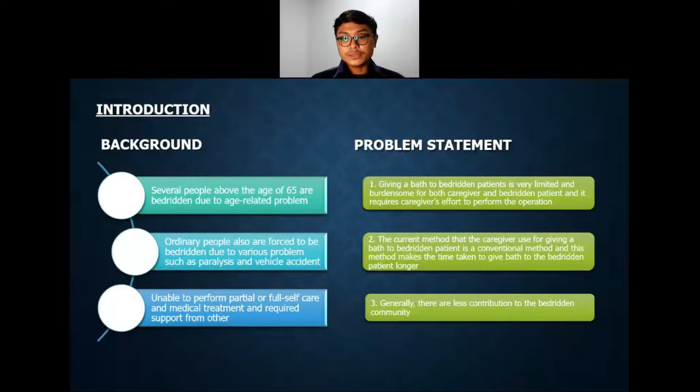And my problem statement in this PSM2 is that giving a bath to bedridden patients is very limited for caregivers and bedridden patients, and it requires caregiver effort to perform the operation. The current method that the caregiver uses for giving a bath to a bedridden patient is a conventional method, and this method makes the time taken to bathe the bedridden patient longer. Generally, there is less contribution to the bedridden community.

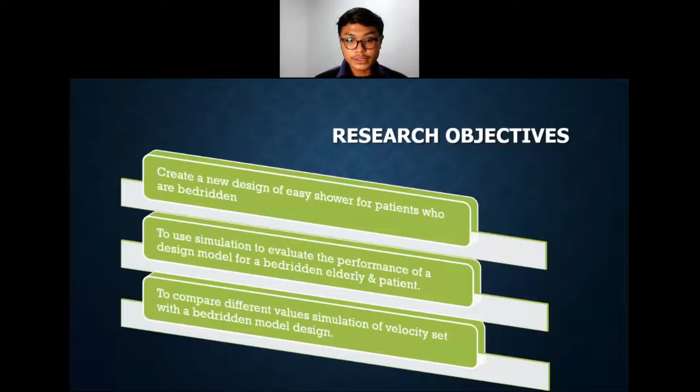My research objectives are to create a new design of easy shower for patients who are bedridden, to use simulation to evaluate the performance of a design model for bedridden elderly and patients, and to compare different values of velocity set with the bedridden model design. So my scope in this project: this study will use a simulation process to design and analyze the shower design and evaluate the different values of velocity set with the design for the bedridden elderly and patient.

So we go to the literature review related to my PSM2. Downey and Lloyd 2008 stated that bed bathing can help manage hygiene for bedridden patients with two methods. The first is cultural awareness and personal preference. Caregivers should consider elderly and patient preference so that the bedridden will be in a comfortable condition. And then another one is privacy and dignity. Without confidentiality during the procedure, the patient may feel uncomfortable or even irritated.

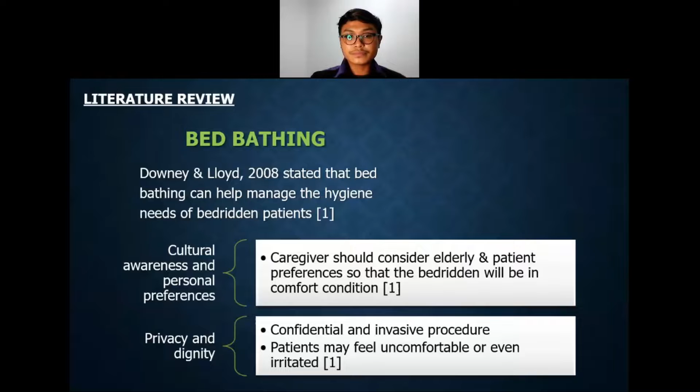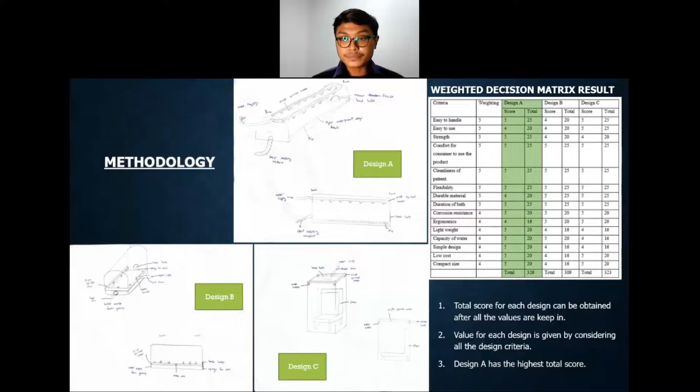So I will go to the methodology. It has been discussed in PSM1. There are design A, design B, design C, and I already chose design A because of the evaluation method result. The total score for each design can be obtained after all the values are given. Values of each design are given for all the design criteria. And design A has the highest total, as you can see in the green line.

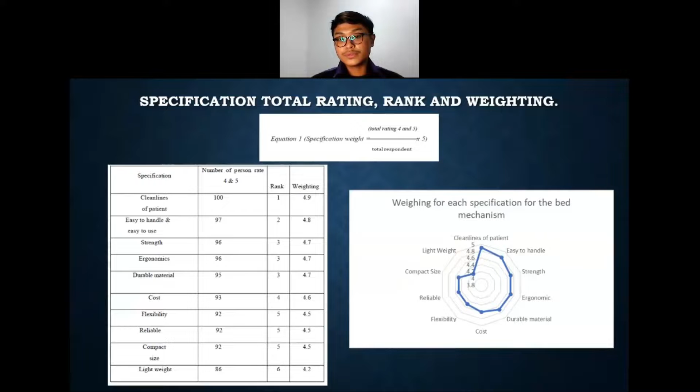So from the result, we get the specification ranking and weighting. And in this specification, I chose the three highest, which are cleanliness of patient, easy to handle and easy to use, and lastly strength. Actually, strength is very important for bedridden, but we must focus on the cleanliness of the patient.

So next, after the result, we go to the final design. Design A obtained the highest score and had been chosen as the design for simulation. There are some modifications that had been made on design A. The original design A has 1 water inlet and 7 water outlets, which are the sprinklers, and the position of the water inlet and outlet is different.

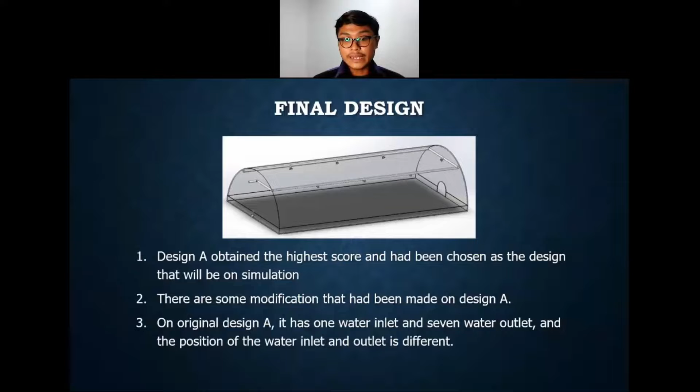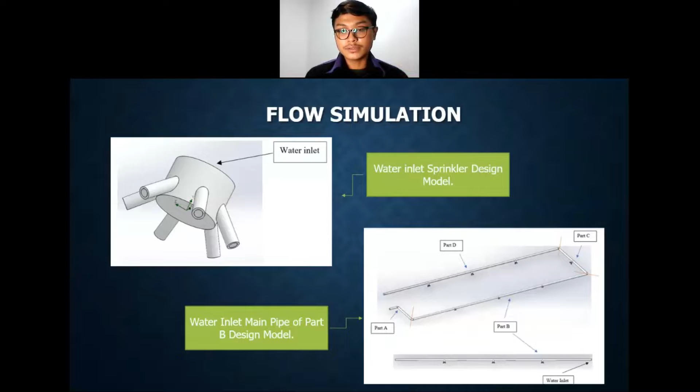So in this flow simulation, I provide only two simulations, which are the water inlet sprinkler design model and the water inlet main pipe of part B design model. Why I choose part B? Because it has been split into four, which are part A, part B, part C, and part D. Why part B? Because it actually has the same result as part A, part C, and part D. The initial and final results are the same.

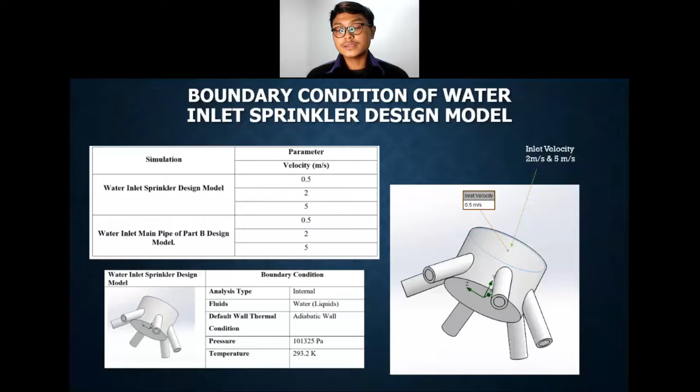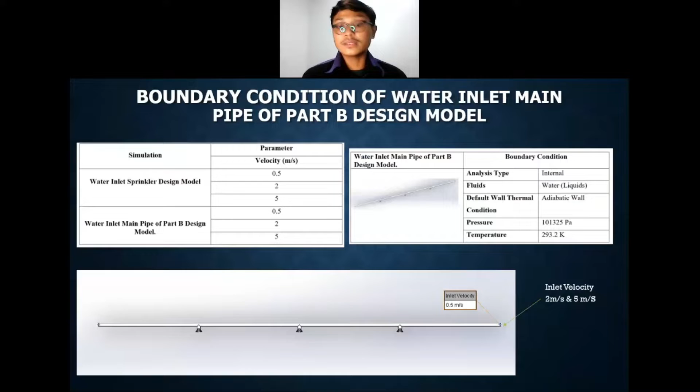I choose the inlet velocity, and then we go to the boundary condition of the water inlet main pipe of part B design model. The parameters are the same as the water inlet sprinkler design model. The boundary condition is also the same: analysis type, fluid, default wall thermal condition, pressure and temperature. In flow simulation, why I choose this? Because the initial flow is the inlet velocity. So we go to the result and discussion.

Flow analysis, for this I discuss the flow analysis trajectory simulation water inlet of sprinkler design model. It shows two types, which are velocity and pressure. So I will discuss the 0.5.

For the initial result, I got 0.446 meter per second with similar. And then 2 meter per second, I got 1.769. And then lastly 5 meter per second, I got 4.427 meter per second.

And then the pressure for the 0.5 meter per second, I got 118,446.61 Pascal. And then for 2 meter per second, I got 376077.97 Pascal. And then lastly, for 5 meter per second, I got the pressure 1799710.48 Pascal.

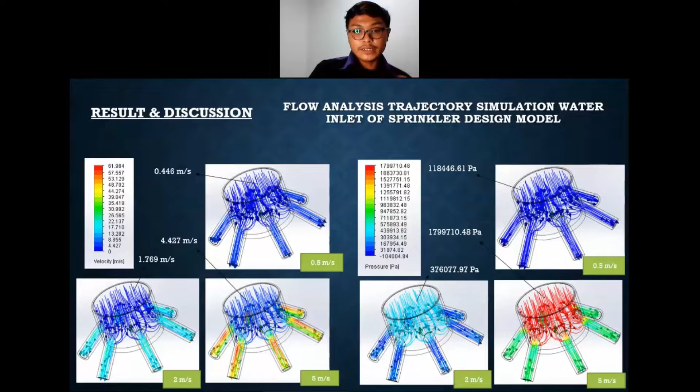Why velocity and pressure flow was different? Because velocity initial was slow, but the orifice sprinkler, which is a nozzle, inside the nozzle was higher, and then the pressure initial result was higher, but in the orifice sprinkler the pressure was slower.

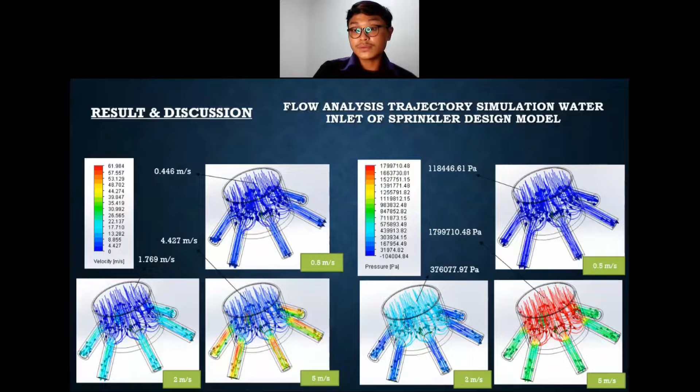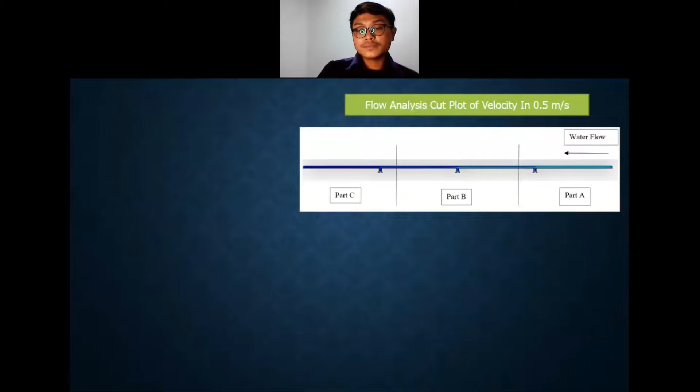So we go to the flow analysis, flow cut plot, water inlet, main pipe of part B design model. So I divide it into three parts: part A, part B, and part C.

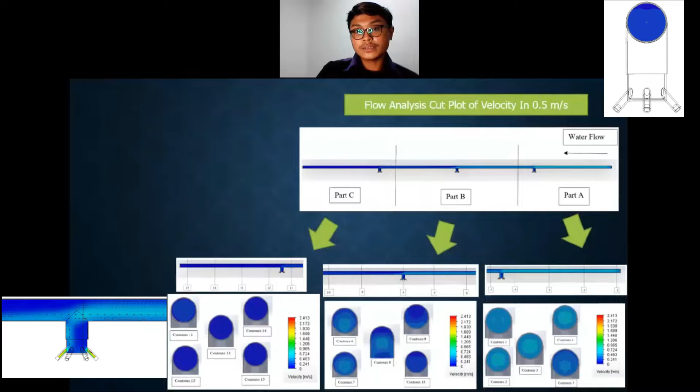So this is the pattern of the flow analysis cut plot of velocity at 0.5 meter per second. So I will discuss the graph. For the first sprinkler at 1.66 meter, I got 0.597 meter per second.

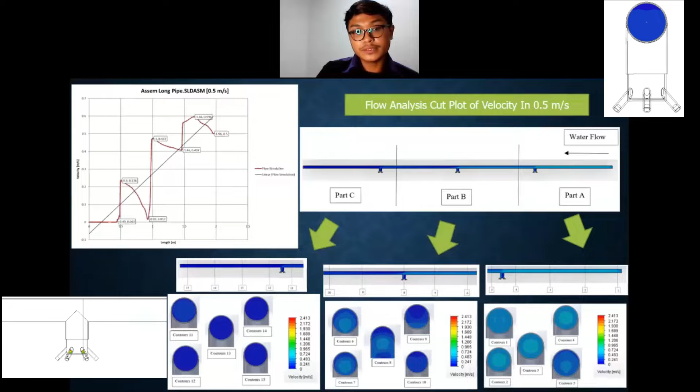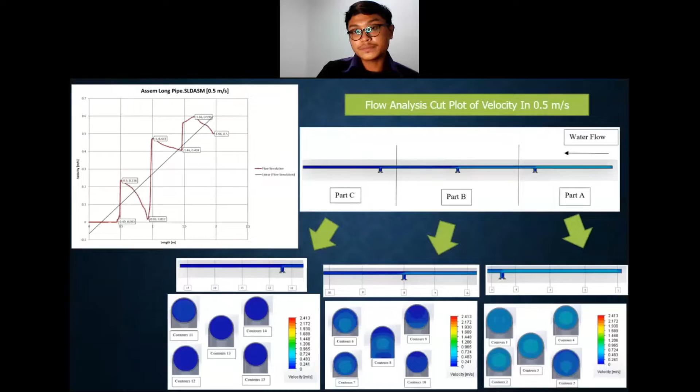And the second sprinkler, I got 0.472 per second at 1 meter. After the final result of sprinkler, I got 0.236 meter per second. And then the pressure was the same.

And the same method, with part A, part B, part C. And then what we can see, the pattern, part A and part B were different, but part C was similar.

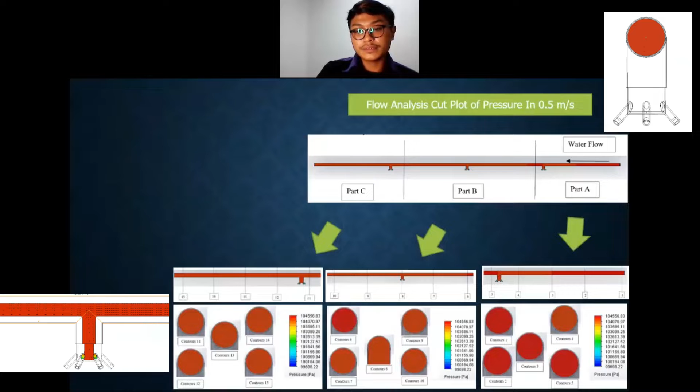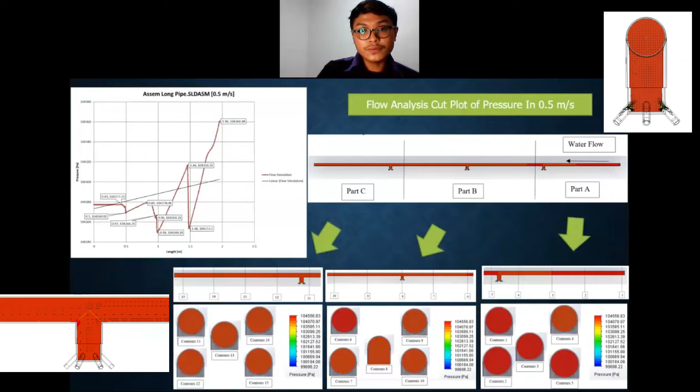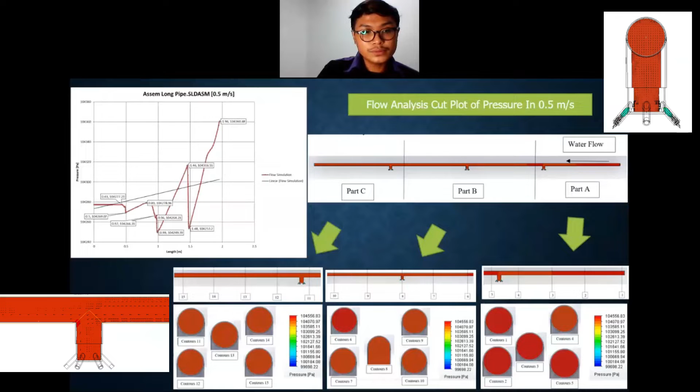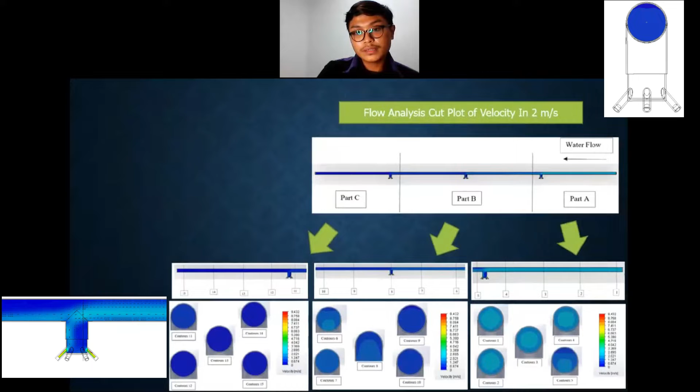And the part A, the pattern was similar. Part B was much different, but in part C, it was a similar result.

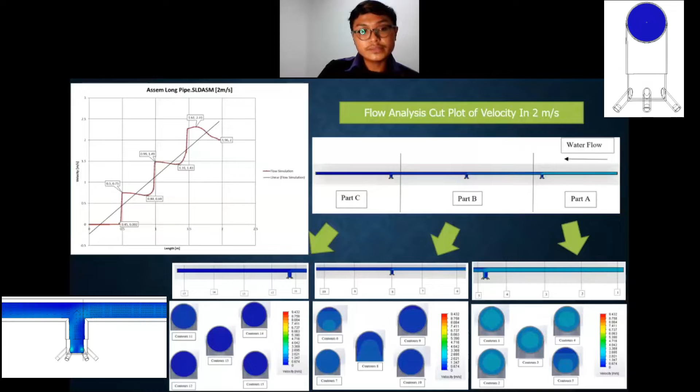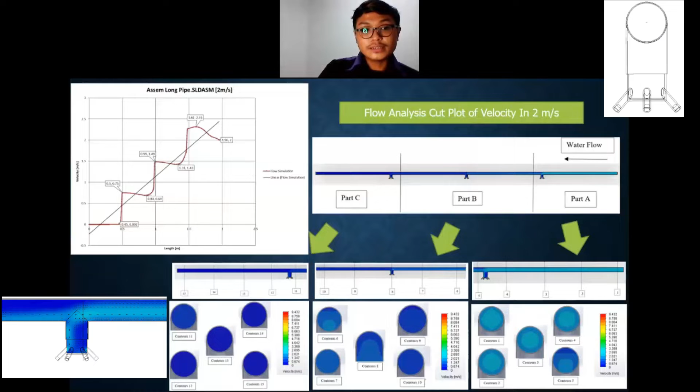So the first sprinkler actually, I got 2.31, and the second sprinkler, which is 1.49 meter per second, and lastly I got 0.75 meter per second.

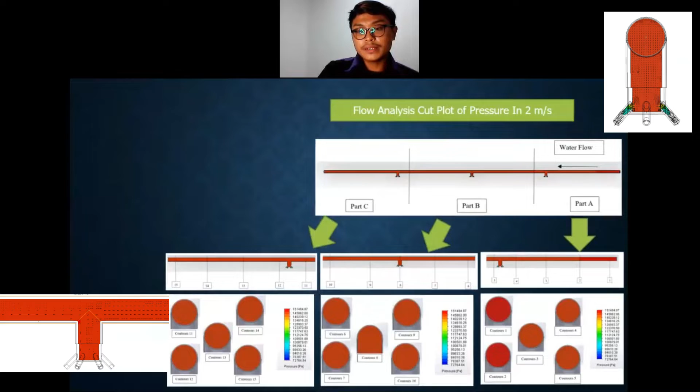While the pressure, the part A was a different result, but part B and part C were similar results.

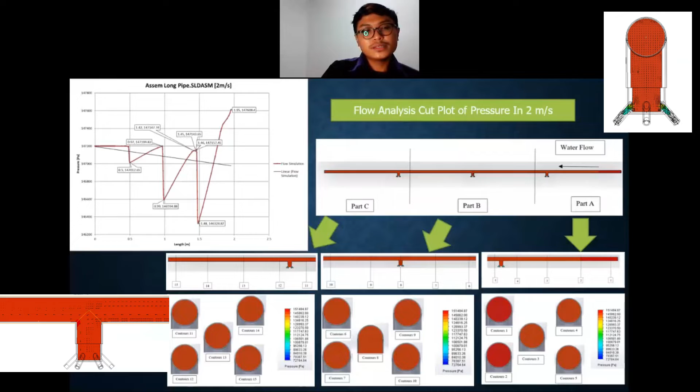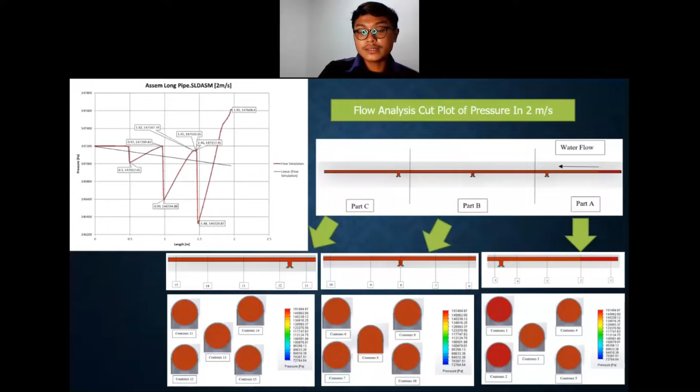And lastly, the final result with the same result as part B in the middle sprinkler, which is 147,199.83. And then lastly, for the velocity at 5 meter per second, part A, the pattern was similar.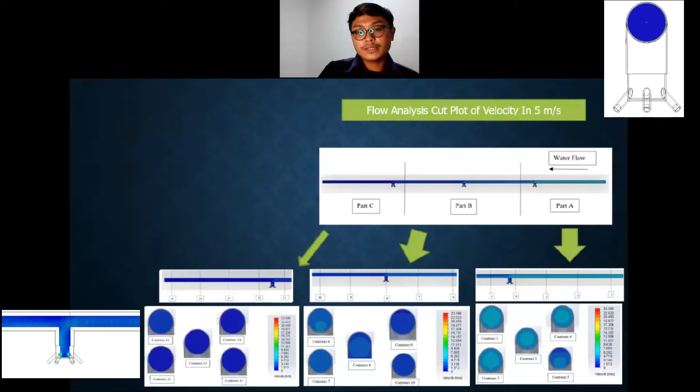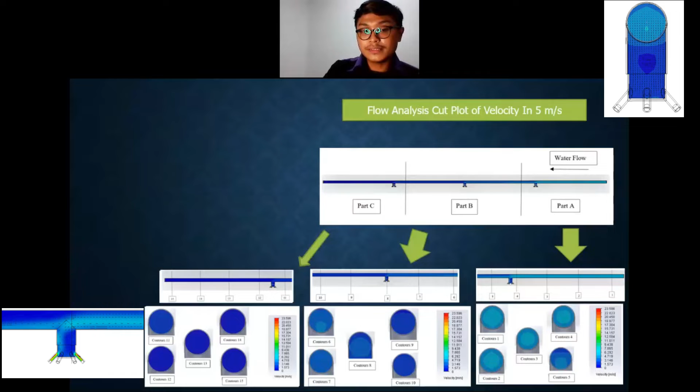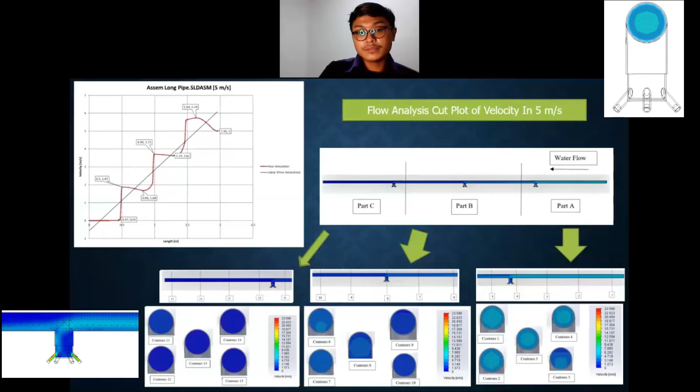But part B changed because of what we call the vortex, and part C was quite similar. I will discuss the first sprinkler, which is 5.74 meter per second, middle 3.71 meter per second, and lastly 1.87 meter per second.

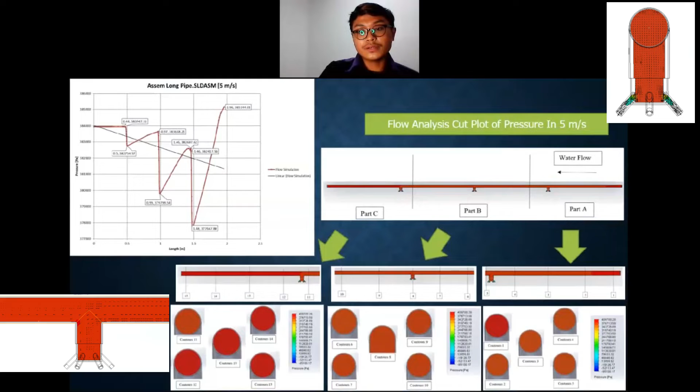While the pressure, I got a different result with part A and part C.

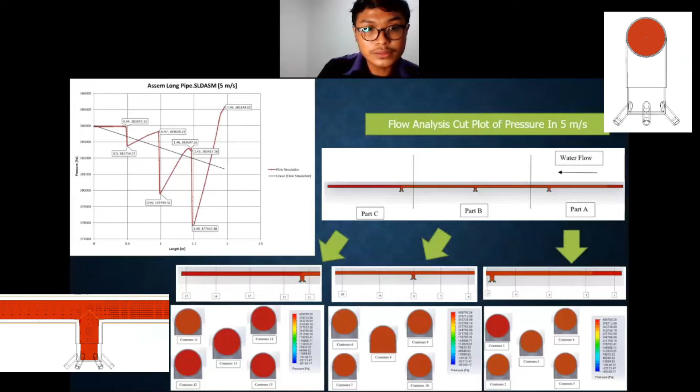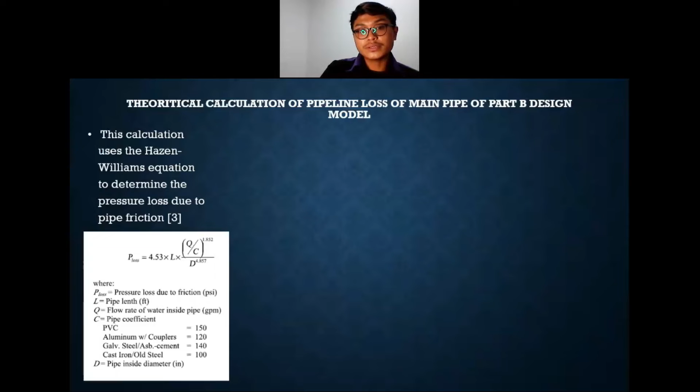So in theoretical calculation of pipeline loss of the main pipe of part B design model, this calculation uses the Hazen-Williams equation to determine the pressure loss due to pipe friction. So this is a parameter of the main pipe of the part B design model.

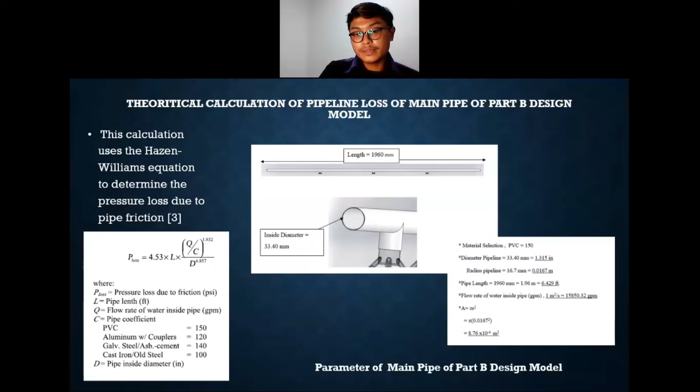So after I calculated, by velocity 0.5 meter per second, I got 0.026 psi. At velocity 2 meter per second, I got 0.324 psi. And lastly, at velocity 5 meter per second, I got 1.8849 psi.

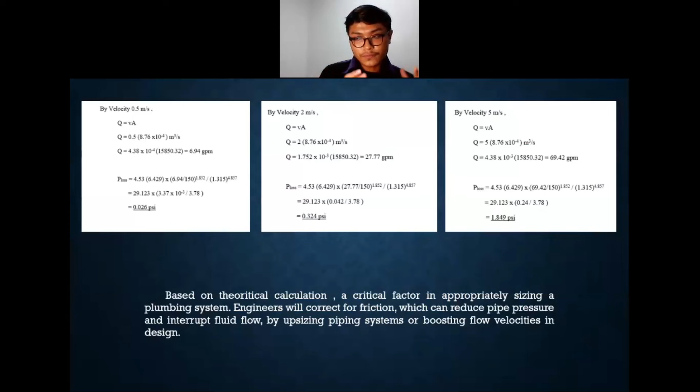So based on the theoretical calculation, a critical factor in the ability to size a plumbing system, engineers will correct for the friction actually, which can reduce the pipe pressure and interrupt fluid flow, by upsizing the piping system or boosting flow velocity in the design.

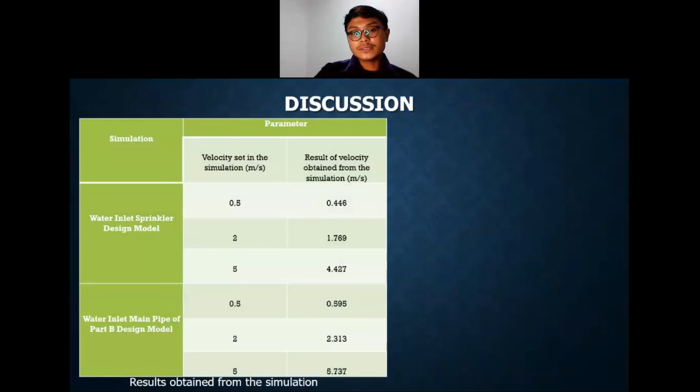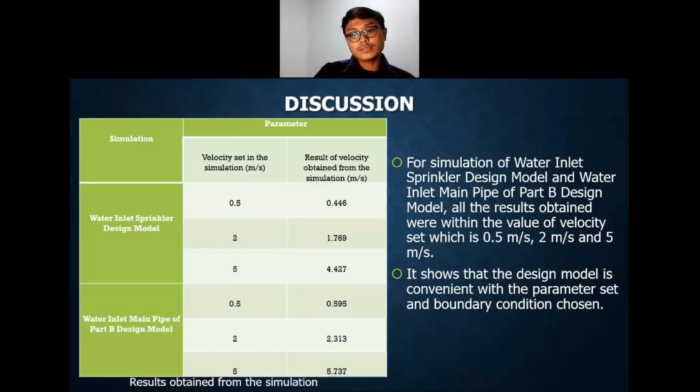So after the result, I will discuss the parameters for the simulation of water inlet sprinkler design model and water inlet main pipe of part B design model. All results obtained were within the value of velocity set, which is 0.5 meter per second, 2 meter per second, and 5 meter per second actually. This ensures that the design model is consistent with the parameters set and the boundary conditions chosen.

So in conclusion, this thesis presents a new design model of an easy shower for the bedridden patient. The process of design and simulation has been done by using SolidWorks software. And lastly, the proposed methodology is effective in order to obtain a good result, utilizing only fairly accurate means.